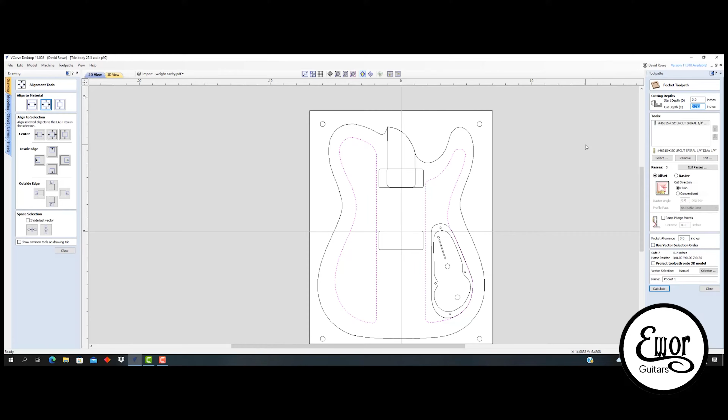So now it's time to set up the tool paths to cut the chambers and the wire routes in the body. You can see the 2 chambers in this drawing, and I drew those in Adobe Illustrator and imported them into this drawing. Now I'm going to go through and set up the tool paths, which includes setting up the bits you use. I'm bringing in the 1-inch surfacing bit, which I'm going to use to remove most of that material.

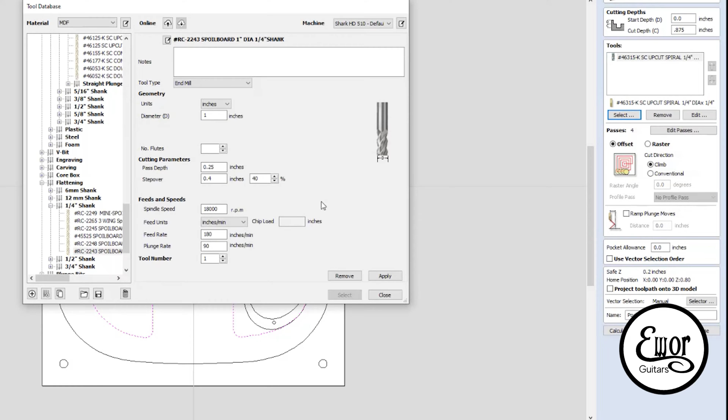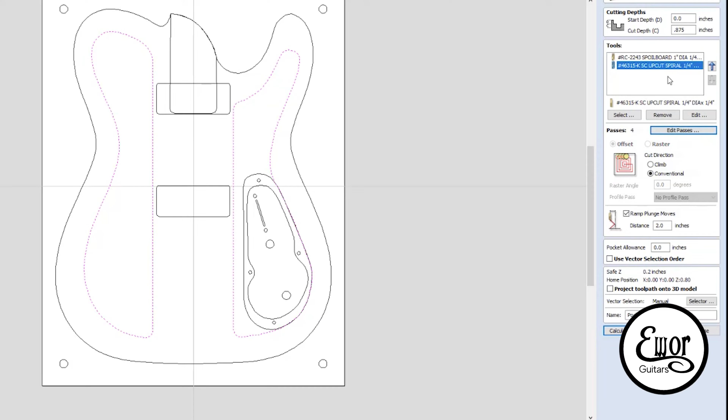Then I want to set up the speeds of that bit, so I set it at a very slow pace because I'm just not that confident with myself. And now I'm going to set up the numbers of passes, which I did about 1/4 of an inch per pass. I set for ramp in on the plunge, which is important when you're using a big bit like that. Now I'm going to go through and calculate the tool paths and have a look.

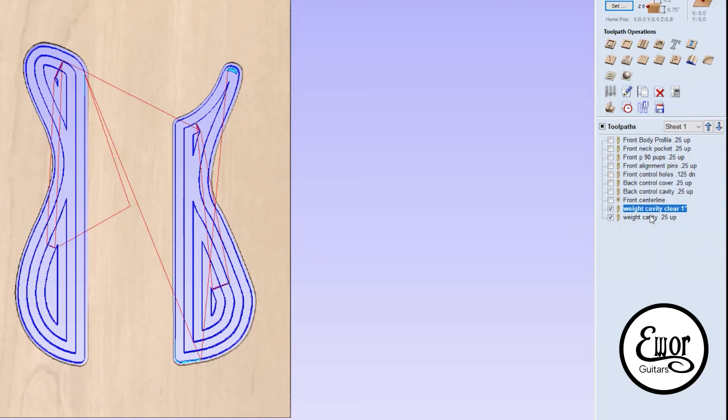So here it shows the tool path on the piece of wood, and it's cut out, and that's what you should see when it's done. Although in my case it will not cut all the way through the material, but that's the shape I'll wind up with. So then I rename the tool path something that I can remember later, and then save it to a file. I put it on my little thumb drive and take it off to the CNC machine to run it.

Okay, so I'm going to cut the weight relief cavities in this body. I'm going to do one on each side. I just drew it in V-Carve and I sent the tool paths over. Now for this particular thing, since we're clearing such a large area, I'm first going to cut the perimeter outside with this. This is a 1/4 inch up spiral end mill.

And I'm also going to use this 1-inch surfacing bit, which once I've completed the perimeter, I'll change out the bits and run the clearing tool path, as it's called, with this 1-inch bit. So I'm a little nervous about this, but let's go ahead and do it. First thing I've got to do is switch out and put my 30-degree bit back in here, reestablish the center line, and then we'll switch the bits back out, do my Z, which is the height, and we'll start cutting away.

Incidentally, now you can see that I have my fixture down, my alignment fixture, and I've got this body, the back of the body is mounted on those alignment pins, and I'm just holding it down with these two clamps here to make sure it doesn't lift or anything. So anyway, let me swap out this bit and let's get rolling with this.

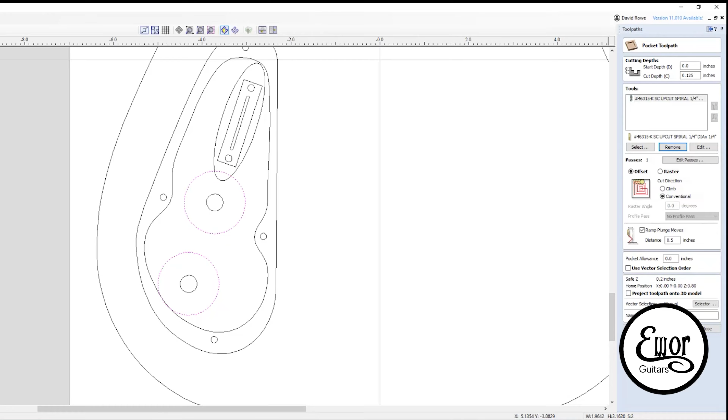So every time I use this V-carve program, I get a little more confident, and I was able to lay out the switch and the two controls, and then I did the toolpath, and it's pretty cool too. When you draw it, you could then run it on this piece of wood that's on the screen there, and actually rotate the wood around and see if your cuts were as you had planned, and it worked out really well. So I just started my machine going, put that toolpath into the pendant, and it cut it away.

So far in my early stages of learning how to use this machine, I'm realizing that everything I use this machine for, I used to do with a template and a pattern bit and a router. So I'm basically trading my skills of making templates, because using a template is a piece of cake, there's nothing to it. But I'm trading my skills of making a template for the skills I'm learning using this machine. And I'm cool with that.

Somehow using the design software in this machine is teaching me so much about the intricacies of building a guitar that I really feel like I'm becoming a better woodworker, a better guitar maker because of it. This has been a really cool experience and a cool journey for me, and I could definitely see where this machine is going to keep a place in my shop and be a part of my woodworking journey.